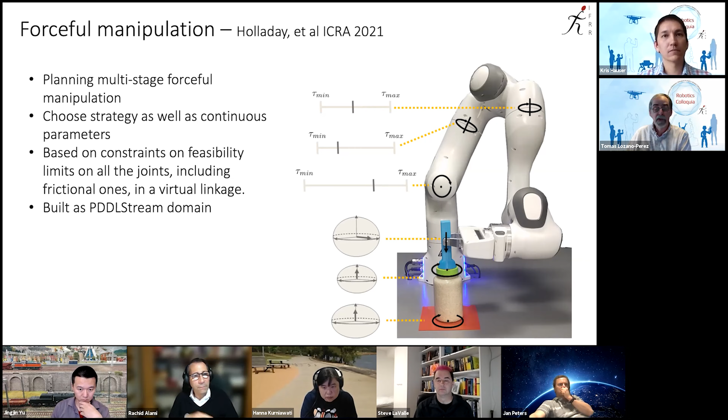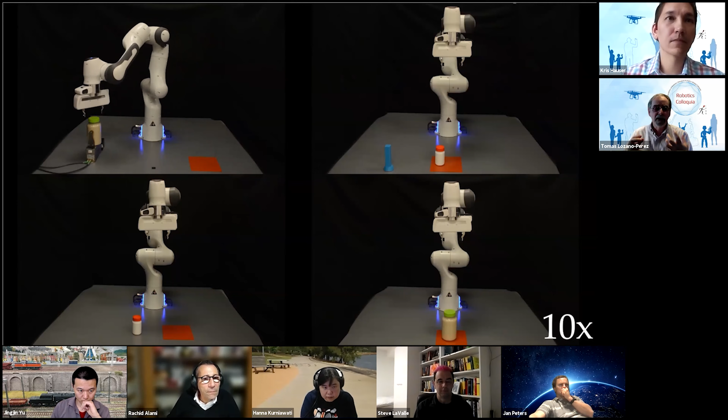Rachel was able to address this problem within the context of PDDLStream, and let me show you a couple of the examples. The idea is that there are many ways of doing such a task, and you want to specify it so that the robot can pick the best way of doing it. One of the constraints is that you need to be able to resist the rotation force with, for example, friction from that red pad, or it could be from using a vise. You could turn the cap by holding it with the fingers.

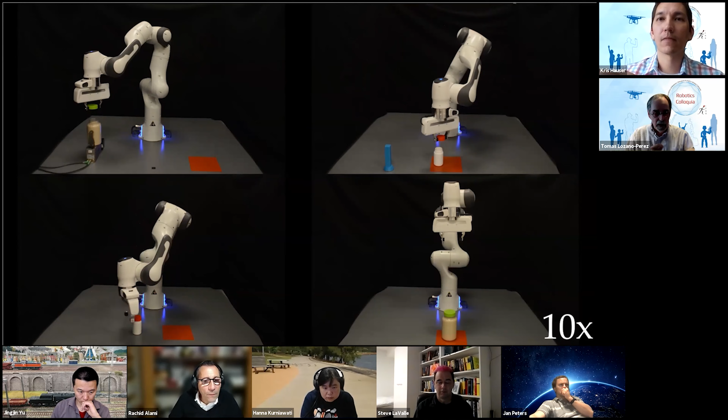You could turn the cap by moving it to the red surface, because the friction coefficient is not high enough to resist the turning on the regular surface. And finally, at the end, we'll see it open the cap by using a high friction surface on the side of the palm.

Turn it around. Now, the idea here is that this was specified as 'let's take the cap off,' and the robot can exhibit different behaviors depending on the parameters that we know about the task. In this case, the friction coefficients and so on were specified, it wasn't doing experiments or anything. But the combination of searching over the strategies and the motions happen within the context of the task and motion planner.

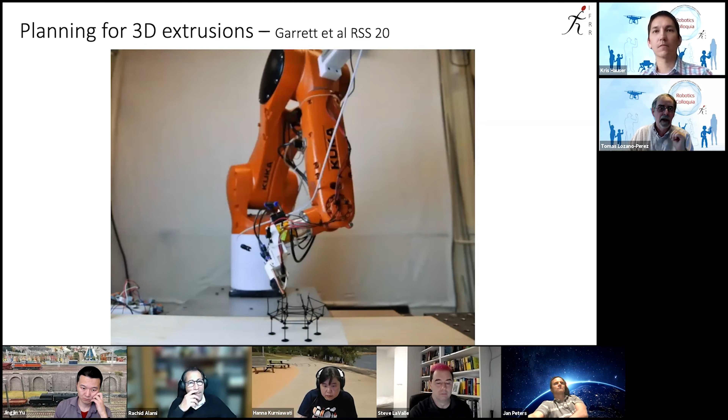Another example is some work that Caelan Garrett and a student from the architecture department at MIT did on doing 3D extrusions. This is a Klein bottle. The motions of this were planned based on a design, and you have to make sure that things don't fall down when you put them there, and that the structure can be supported and so on. This is also built within the PDDLStream framework, but very far from pick and place.

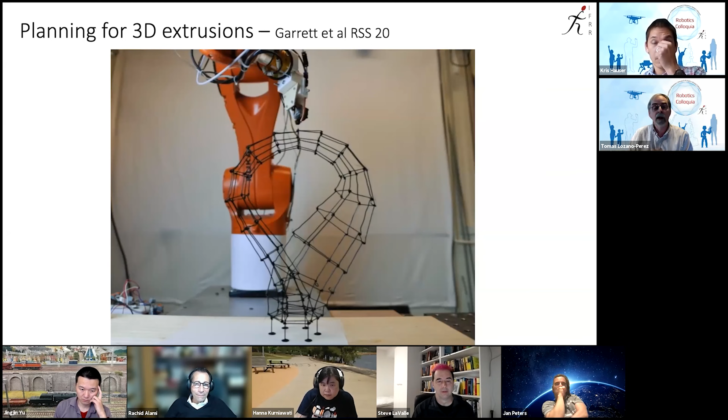So no, it's not pick and place. It is limited by whatever domain you specify, but a broad range of domains can be addressed.

Then there's the idea that TAMP is really only for deterministic and observable domains. This is something we worked on a long time ago, the idea that you can address uncertainty, in particular uncertainty in the poses and configurations of the robot, by having your state estimator construct a belief, which is a probability distribution over the states of the world, and then do action selection within the context of that belief. So we built a system that used perception, using a neural net based thing to try to get the locations of some of the objects and their classes, and then did some estimation of surfaces, so that it would construct the locations of some known objects in the world.

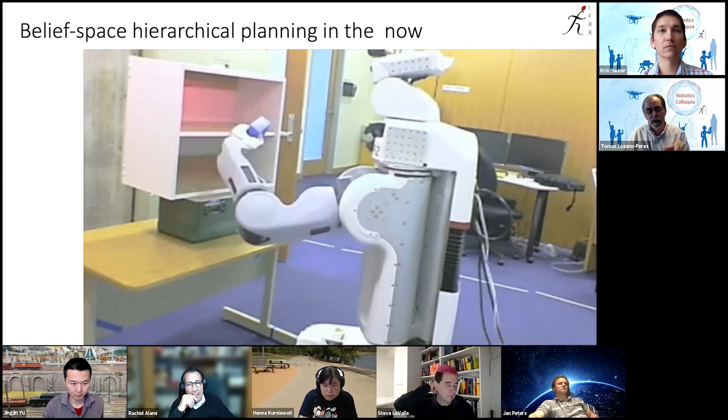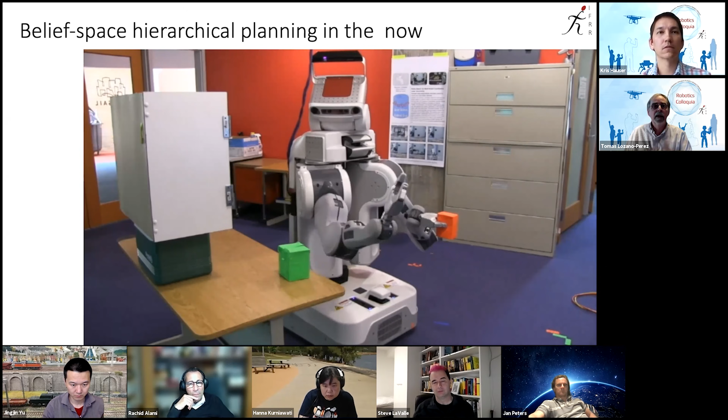This is an old video of the robot being asked to put the blue box in some location, and then it had to move an object out of the way. It decided that since it can't pick up that object, it has to push it to move the obstacle out of the way, but the pushing doesn't work very reliably.

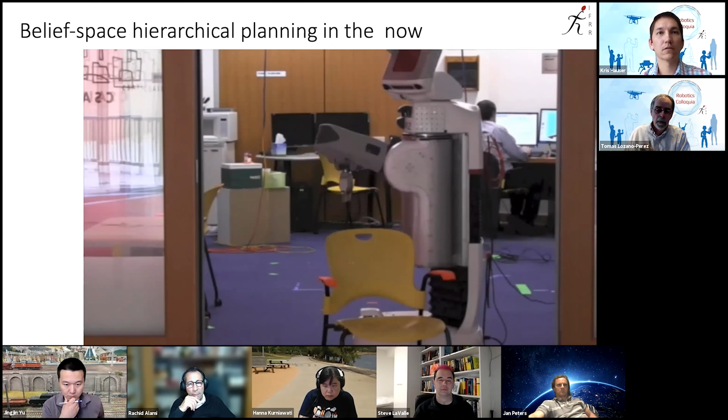It does replanning after observing that it doesn't work. And in here it was asked to move out of the room, and it finds chairs in the way and decides to move them out, planning for all the motions.

Now, there's no learning here. Only Leslie and I learned something from doing this, but there was no learning involved.

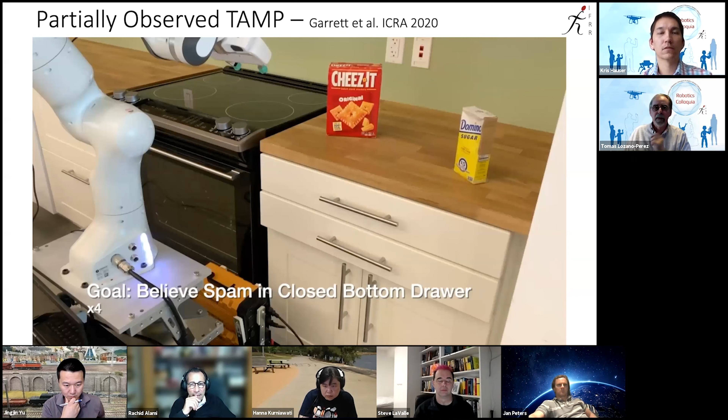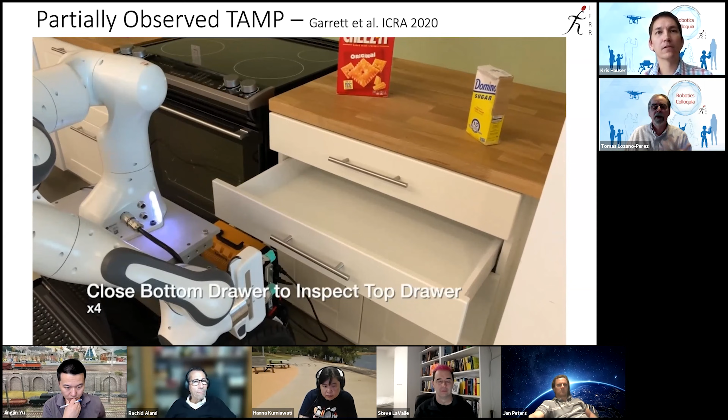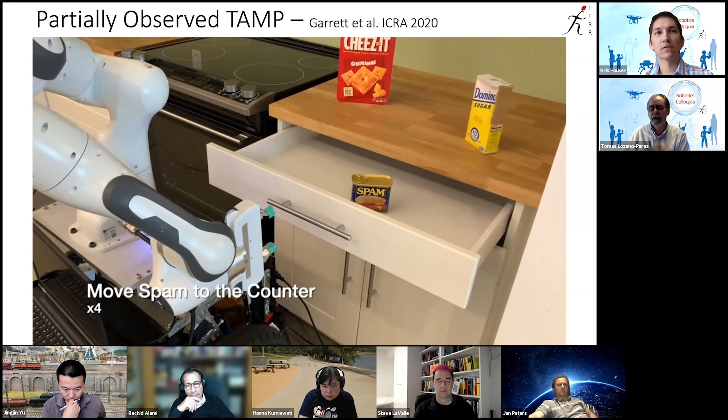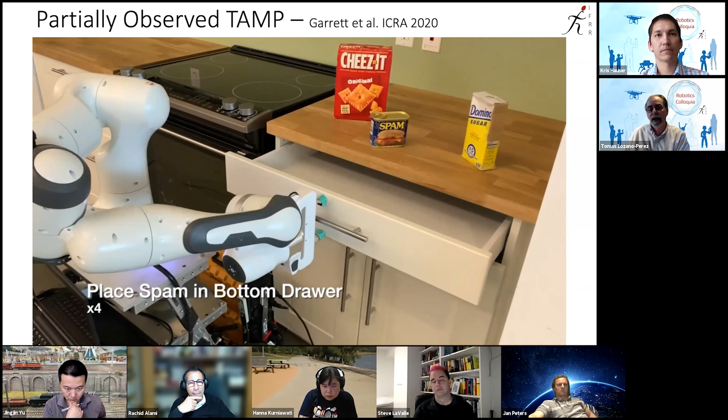This is Caelan Garrett, working at NVIDIA one summer, who did another belief space planner based on PDDL stream. The idea is that it wants to make sure the spam is in the second drawer. So it opened the first drawer, didn't see the spam there. Then the probability distribution about where the spam could be included the first drawer, so it had to open the drawer to find the spam, then put it back, and so on.

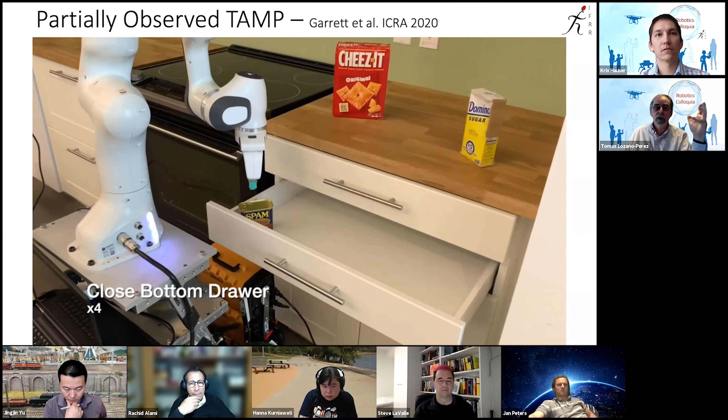Now this was all specified by a high-level goal that the spam be in the second drawer, that they believe with high probability that the spam is in the second drawer. So this shows that it's effective to reason in the presence of substantial partial observability using basically a TAMP type system.

Okay, that was the second piece, and then the third piece will be about the role of learning. Any questions now? We can take one or two questions. Tomas, maybe you can stop sharing your screen so we can see the videos of the front row participants.

Okay. Okay, questions. They're speechless. Make a comment, right?

I thought PDDL stream, for example, does emphasize optimality. Is that true, or? You can run the planner in optimal mode or not. Stream is built on top of fast downward, and fast downward, if you assign costs to the actions, will try to give you an optimal plan. We almost always run it in greedy mode. You can solve longer problems predictably. Yeah, of course. Sometimes, right? Sometimes it does help, right?

This is more like a comment. I also like to hear what you think. The talk is very interesting, I'm just focusing on the question a little bit here. Sometimes optimality does help, makes the plan actually shorter, right? So I don't know whether that plays a role. Another question, related to Hanna's question: when you commit to certain motion and task abstraction, we're kind of ignoring the underlying structure a bit. Sometimes you can argue search is a one-size-fits-all approach, but that ignores, for example, when you have pick and place tasks, there's also some underlying structure. When you commit to this, you're kind of ignoring that structure. I don't know what you've thought about - when you develop this general planner, are you ignoring some other very important aspects of problems?

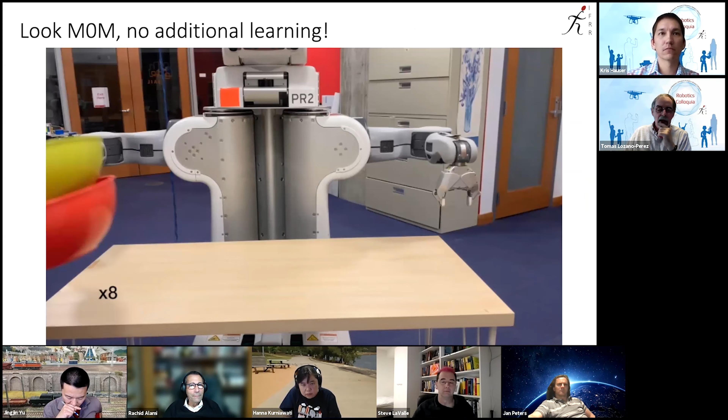So what I'm showing, Caelan here is setting up this. The goal here was put all the fruit in a bowl of the closest color. So it's doing the detection, segmentations, grasping, and then operating on each of these objects without any models.

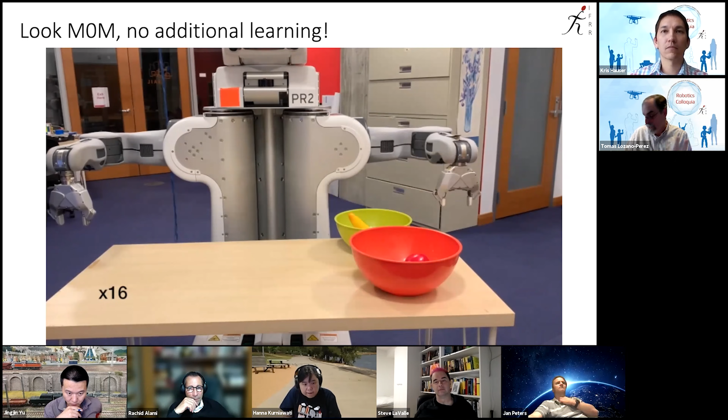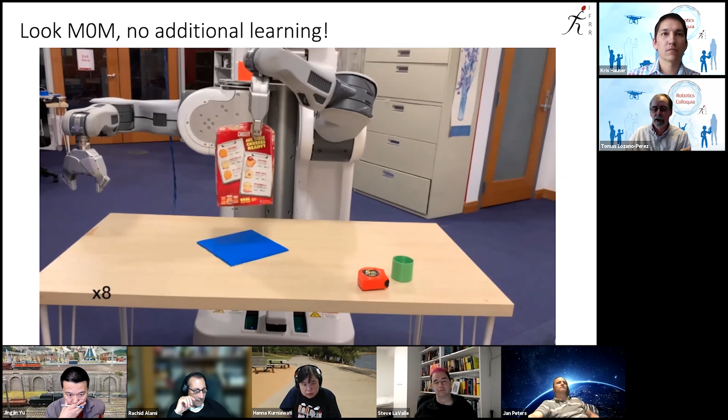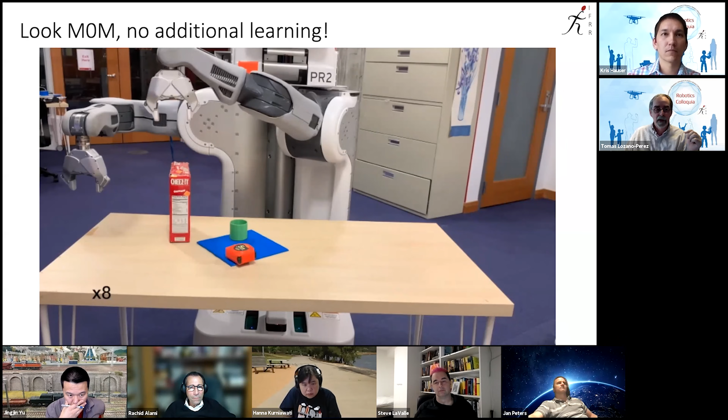Here's another one in which, okay, so now it can't see the two objects that were closer to you. So it moved the box over. The goal is to put everything in the blue area. So then it saw two objects which weren't in the blue area and then moved them to the blue area and then finished off its goal. Again, there are no models. It's just doing things based on its perception.

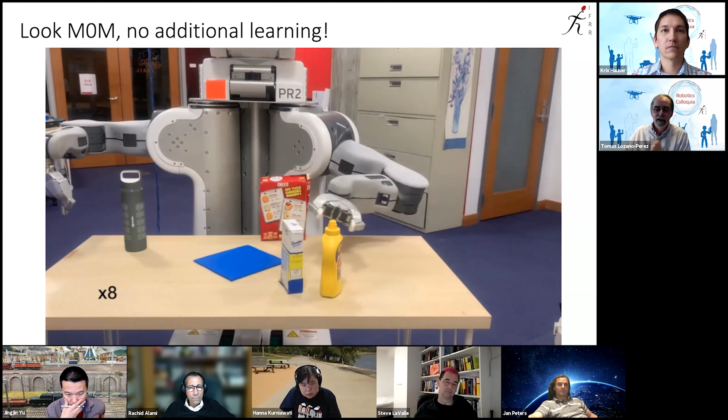Here, the goal is to put the mustard bottle. In this case, it knows about the mustard bottle, and it has to move stuff out of the way. It had a bad grasp to start off with and got a good one and did its job.

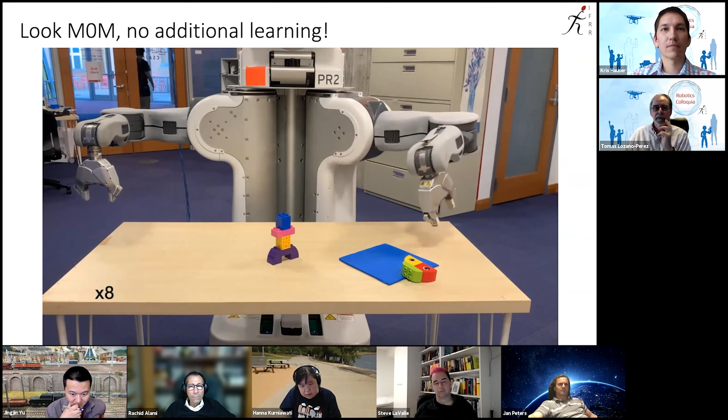This is one of my favorites. It's a failure, but it's an interesting failure. The goal was to put this Lego object in the blue area. So it goes, picks a grasp, and oops, the object fell apart. So it looks again, you say, okay, I can do that. Oh, the object fell apart and it fell out of the box. Then it missed. So it goes and replans and, okay, this guy's not in the blue area, let's put him back and then pick up the base and put it there.

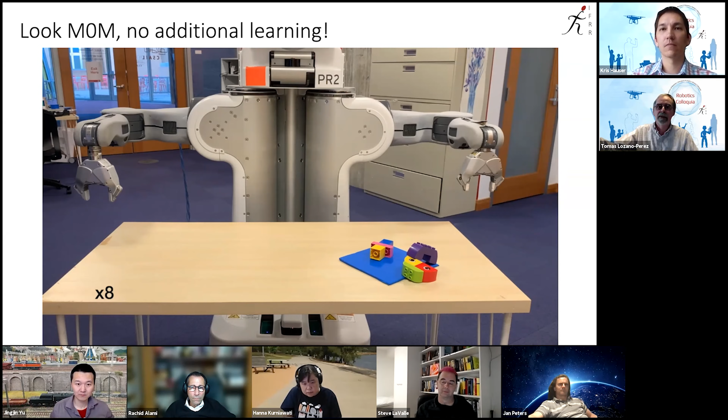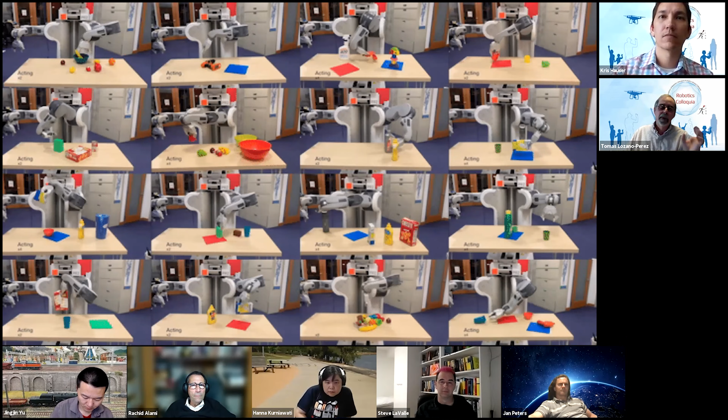So the important thing about this is it's doing its planning. It's doing kind of long-term planning based on the information that it has, and you get interesting behavior, and there's no learning going on here. It's generalizing based on its domain model, which is mostly a pick and place operation. We've done a lot of these. It's very easy to set up cases, and we've done a lot of them. The only limitation has been the limited access to the robot during the pandemic.

But all right, so that was learning perception and using it within the planning system. Then the other area that's of interest is learning operators, which is one of the kind of big issues.

I'll try to breeze through. Okay, so how can you learn operators? What we're interested in is how can you add an operator to a system that already knows how to do stuff, rather than how to start from scratch. There's been a tremendous amount of work on learning skills over the years. People have worked on this. The question is, how can we add a skill to an existing set of skills that's composable, and that's been our focus in this work.

The idea is that if we get a skill which has some parameter, for example, imagine that you had something that was a gain, you can construct an operator in which the skill is pouring, which has a gain, and it produces some result. It has a set of preconditions which introduce variables into the problem, like which grasp you're using and the width and the height of the object and so on. So the other thing that the operator has is a constraint which involves all those variables. In order for the skill to succeed, those variables have to have a relationship to each other.

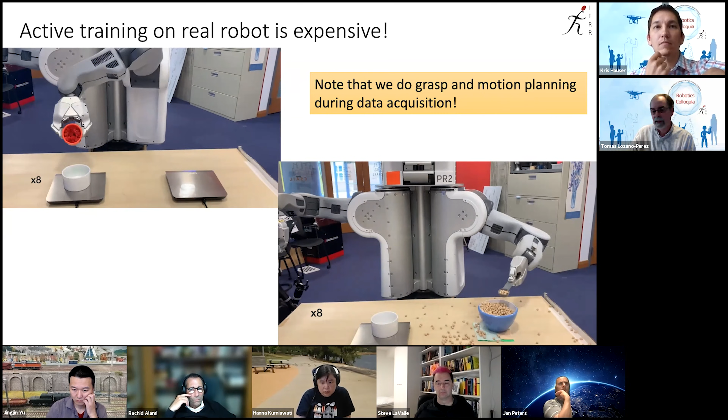This is a training case. Here are some examples of learned pours after it's trained. And here are some learned scoops, which is much harder to do, especially with overfull bowls, but it manages to learn the task.

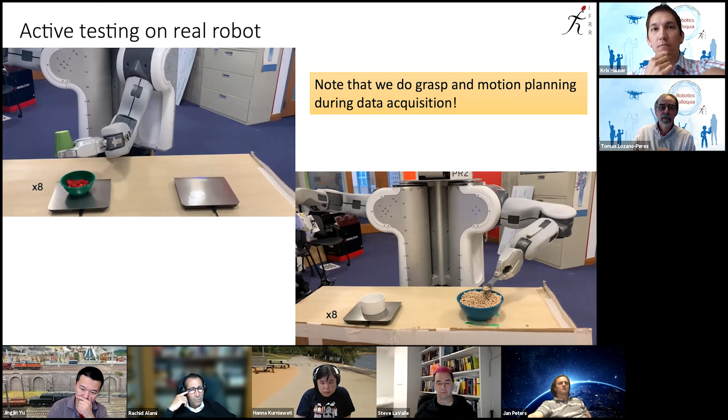The important thing is that once you have that abstract description of the task that the operator gives you, you can combine it with other skills, like pick and place, to do complicated tasks. You can bring the bowl to a place where you can pour, because you understand the relationship of where things have to be for the pour to succeed. All of this can be done in one system. And now if you want to add pushing and cutting and so on, you can put it all in the same framework, and it works.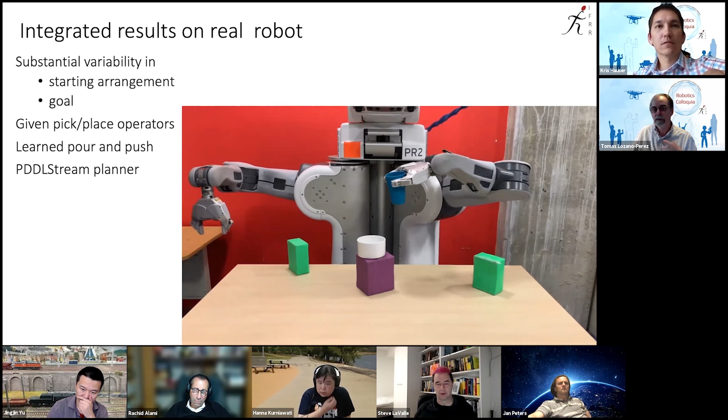This is another project we've done recently, which involves learning a global constraint on the state. For example, if you want to stack blocks, these are weird blocks with weights in weird places so that they're very hard to stack. The robot knows where they are, but it's actually hard to model the conditions under which it succeeds.

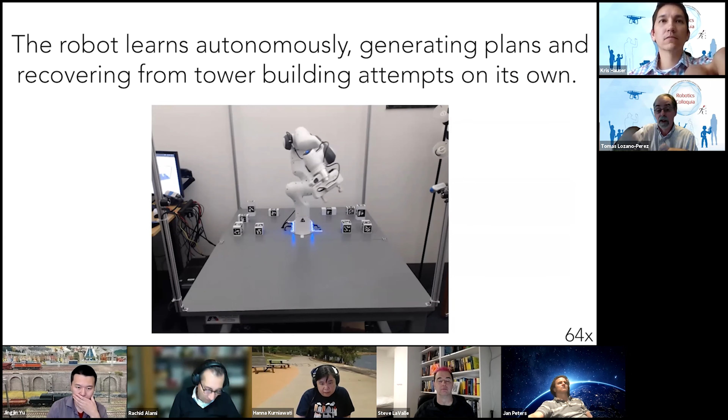So what we've done is set up the robot as an experimenter. It builds these stacks, learns from them, and then cleans up after itself. This uses the PDDLStream framework for the learning infrastructure. The result is that if you use analytical or simulated models of stability, they don't work as well as the ones learned from the robot experiments. The robot built 400 towers over 55 hours of continuous operation, and it learned from that a more global model of the system.

Now, we can also learn how to make planning faster by learning Q functions at the abstract level. I don't have time to talk about that, so I'll skip this. It works and so on. There's a lot of other stuff to do, in particular this issue about learning where the abstractions come from.

But I guess what I've been trying to push is the idea that if you care about general purpose robots, it's very important to pick methods that have properties that lead to generalization over goals and generalization over environments. This is what will enable us to attack complicated problems that involve a variety of environments and tasks. All right, thank you for your attention, and sorry that I ran over.